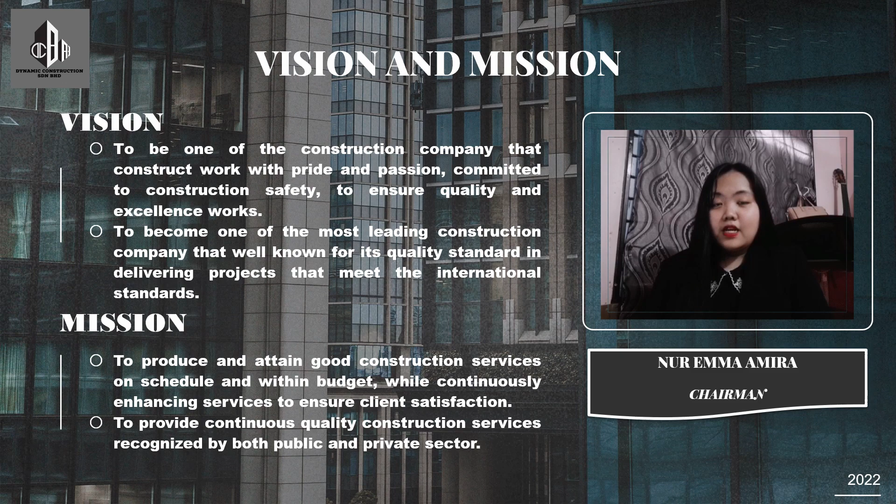We have two missions. One is to produce and attain good construction services on schedule and within budget, while continuously enhancing services to ensure client satisfaction. Another is to provide continuous quality construction services recognized by both public and private sectors. That's it for our vision and mission. Thank you.

This is the corporate structure of Dynamic Construction Sendirian Berhad. The chairman of this company is me, Nur Emma Amira. The chief executive officer is Syarifah Zawanie binti Zulkifli. The chief operation officer is Ezzah Amani Nur Afiqah binti Jamlin. The chief marketing officer is Muhammad Hazik Haikal bin Mustafa.

The chief financial officer is Nurul Aini bin Muhammad Yusof. The managing director is Sharon Beatrice binti Jirin. Last but not least is the Executive Director, which is Nur Amirah Fatin binti Mustapha. That's it for our corporate structure. Thank you.

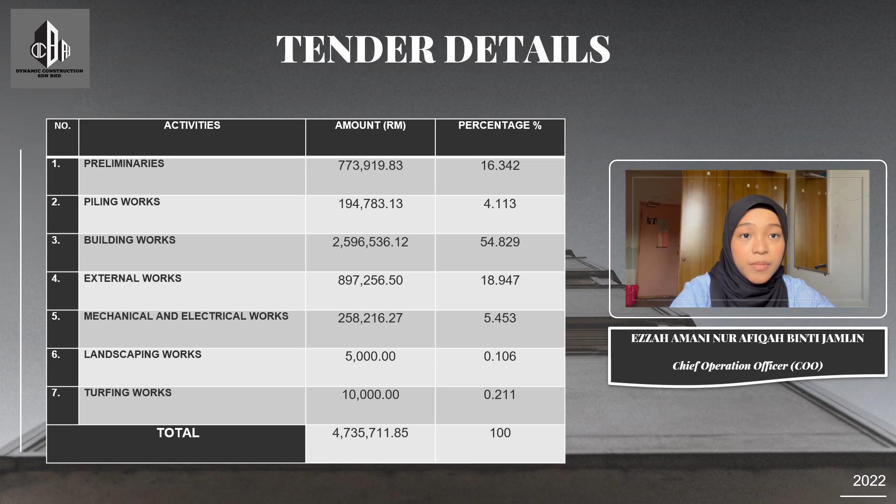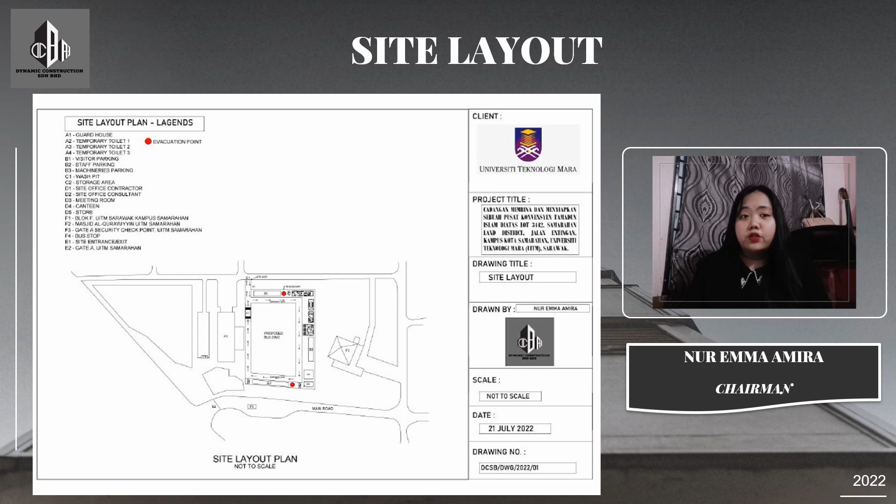Greetings. I present to everyone the site layout for our project. Each detail is drawn carefully by following the standard measurements and based on the actual size and shape of the project site. All the details on the exact location of each building are written in the legends.

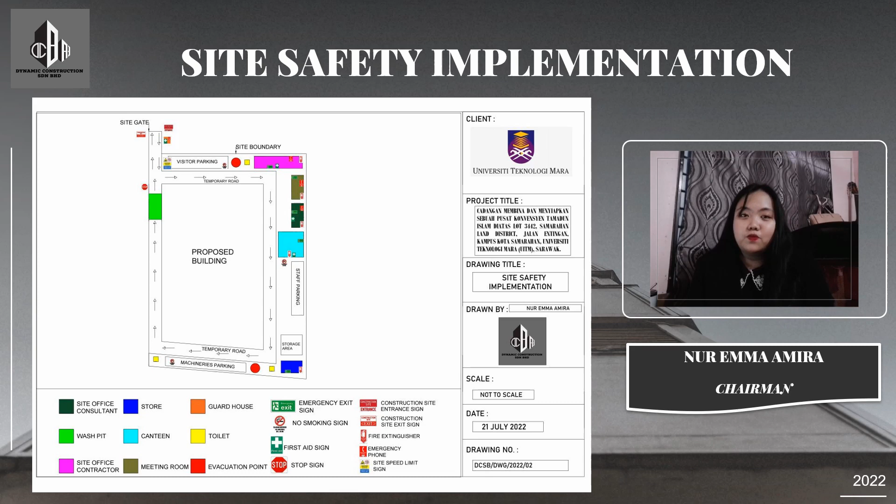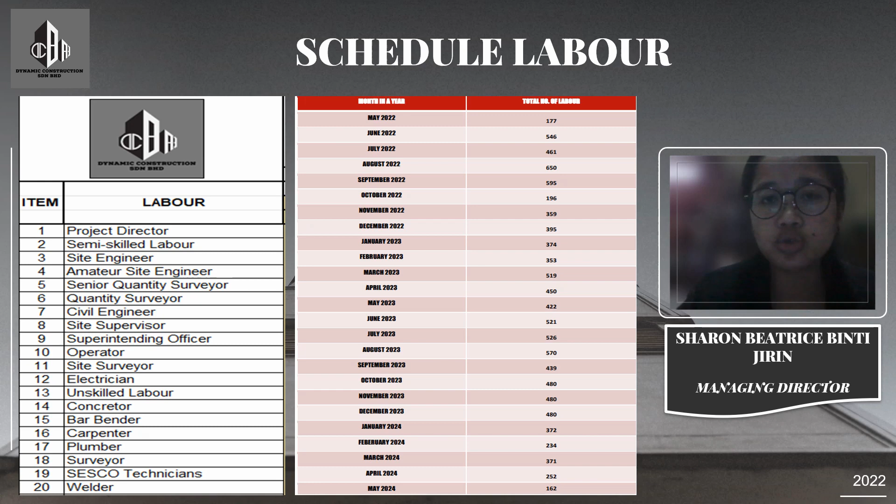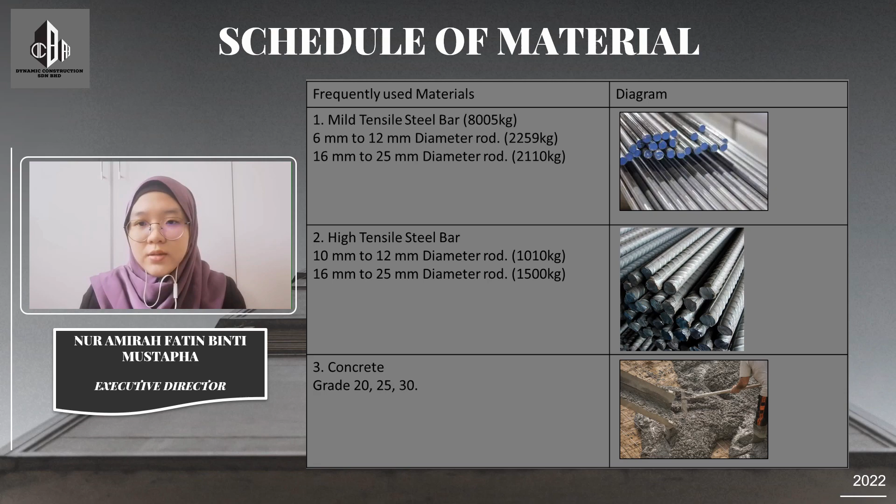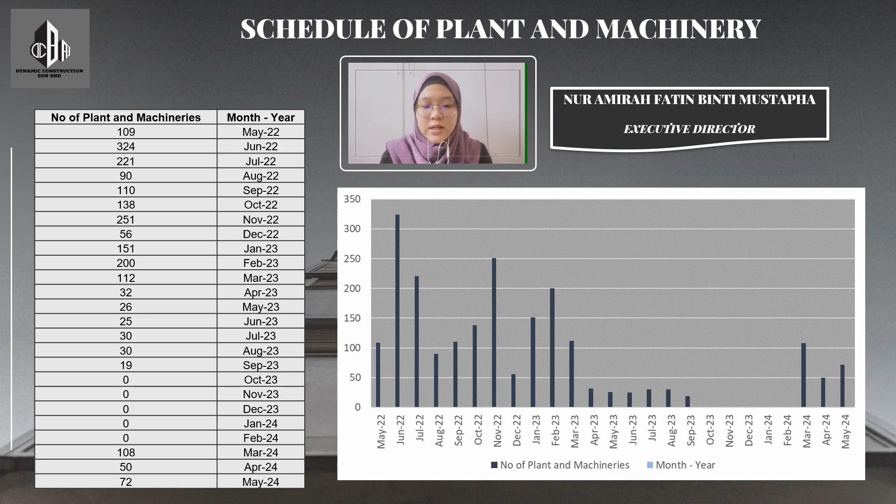Next is about schedule of plant and machineries. The highest use of plant and machineries is 324, which is in June 2022, and the lowest is 19, which is in September 2023.

I will talk more about extension of time. Extension of time is a delay which could not be reasonably foreseen at the time of contract signing. The granting of an extension of time relieves the contractor from liability of damages such as the LAD, from the original date of contract completion for the period of grant.

For our company, the application of extension of time ranges for 3 months for this project, which is the cadangan membina dan menyiapkan sebuah pusat konvensyen tamadun Islam di atas lot 3442 Samarahan Land District, Jalan Entingan, Kampus Kota Samarahan, Universiti Teknologi MARA (UiTM) Sarawak.

Supposedly, our project should have ended by May 2024, but because of the extension of time, it will end around August 2024.

The reason for our extension of time is because of the delay in material shipments, which is also approved under PAM 2006 clause 23.8, which states that delay caused by any appropriate authority and service provider in carrying out or failing to carry out their work, which affects the contractor's work progress, provided always that such delay is not due to any negligence, omission, default, or breach of contract by the contractor or nominated subcontractor, is acceptable. That is why the delay in material shipments is more acceptable.

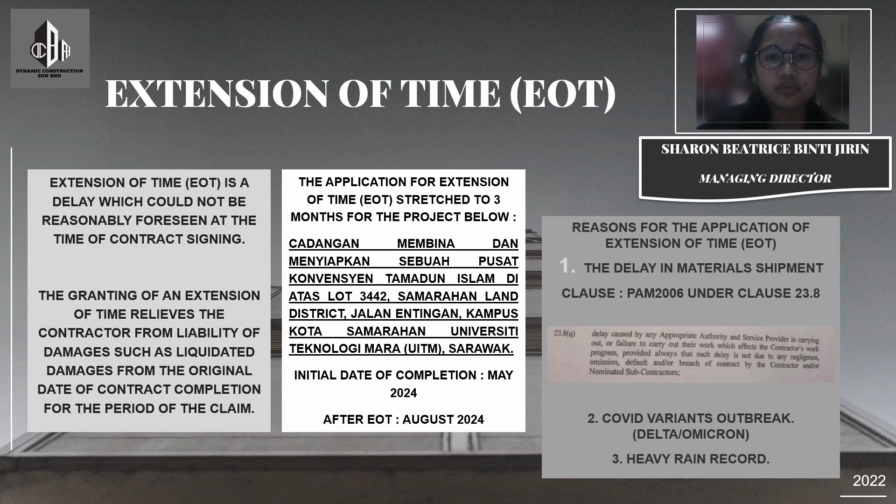Secondly, because of the COVID variant outbreak, the Delta and the Omicron, and lastly, because of the heavy rain record, especially during monsoon season. My name is Nur Amirah Fatin and I'm the Executive Director.

We present about the reasons to apply for extension of time in our project. The first one is delay in materials shipment, from 1 March 2023 to 10 March 2023, because the suppliers who were affected by the COVID variant outbreak were forced to postpone the delivery of materials to the project site. Second is about the COVID variant outbreak, which is the Delta and Omicron.

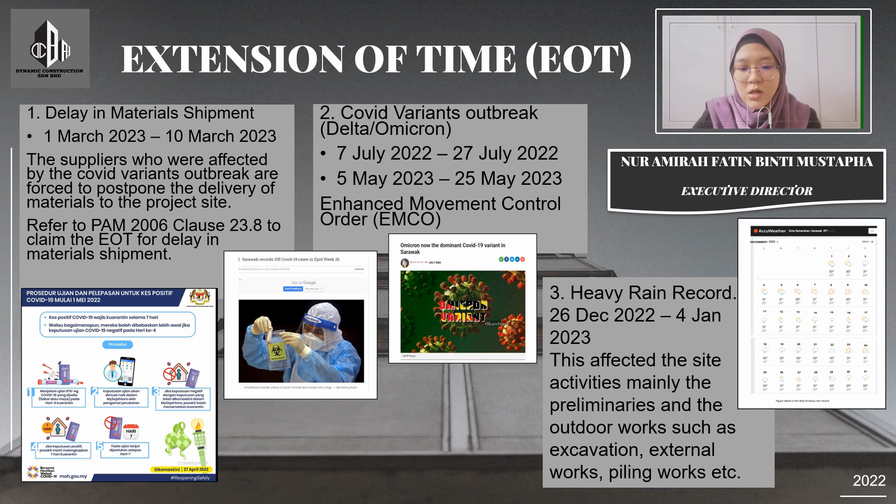For our extension of time, the dates are 7 July 2022 to 27 July 2022, and 5 May 2023 to 25 May 2023, according to the Enhanced Movement Control Order. And lastly, about the heavy rain record that affected the site activities, mainly the preliminaries and the outdoor works such as excavation, external works, and piling works, from 26 December 2022 to 4 January 2023.

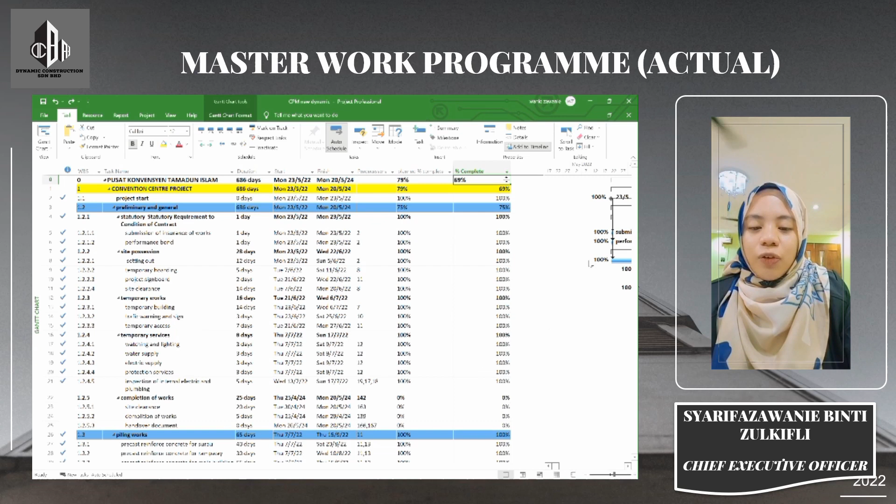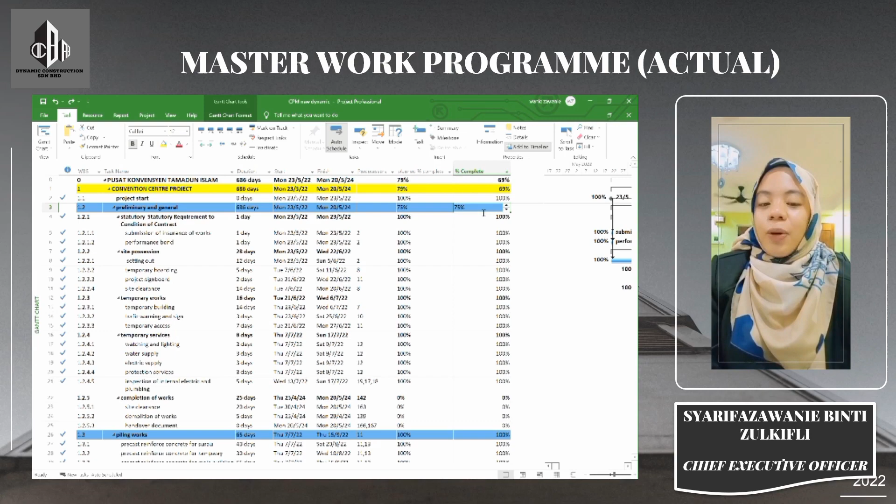Master Work Program is an activity time planning used in construction to control and monitor a project from start until finish. This is the actual Master Work Program for the proposed construction and completion of a convention centre for Islamic civilization on Lot 3442, Samarahan, UiTM Sarawak. This project started on 23rd May 2022 and is expected to complete on 20th May 2024.

In June 2023, the planned percentage of work is 79%, but the actual percent of work complete on site is only 69%.

These 69% of work are made up of preliminaries work at 75%, piling works 100%, building works 68%, external work 100%, M&E works 23%, landscaping works 0%, and turfing works 100%.

The delay of 10% from the planned percentage of work is critically from building works and M&E works. This 10% causes a 74 day delay. Hence, the project cannot finish on track as planned.

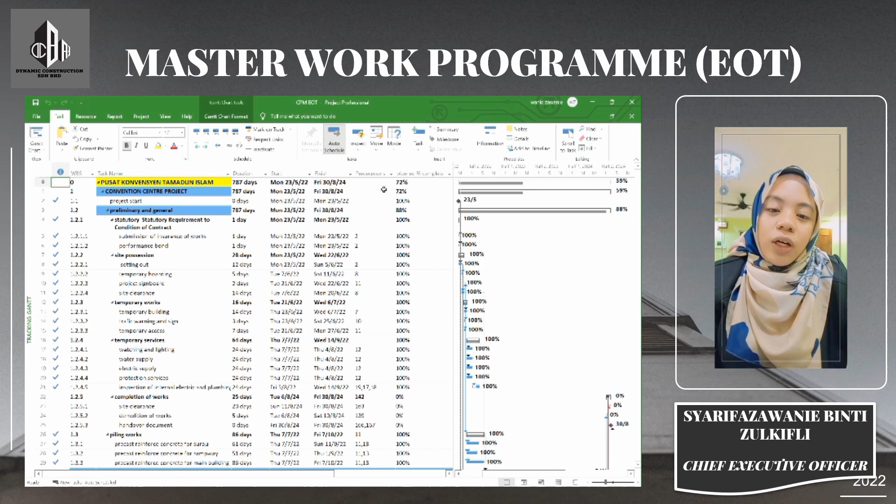So an application for extension of time to recover the delay of work was made, and a new Master Work Program was created to ensure the project can be finished on the new date, which is 30th August 2024, completely without LAD. This extension of time Master Work Program is a continuous planning based on actual performance over 24 months of the project. Hence, it closely controls all the progress of work on site.

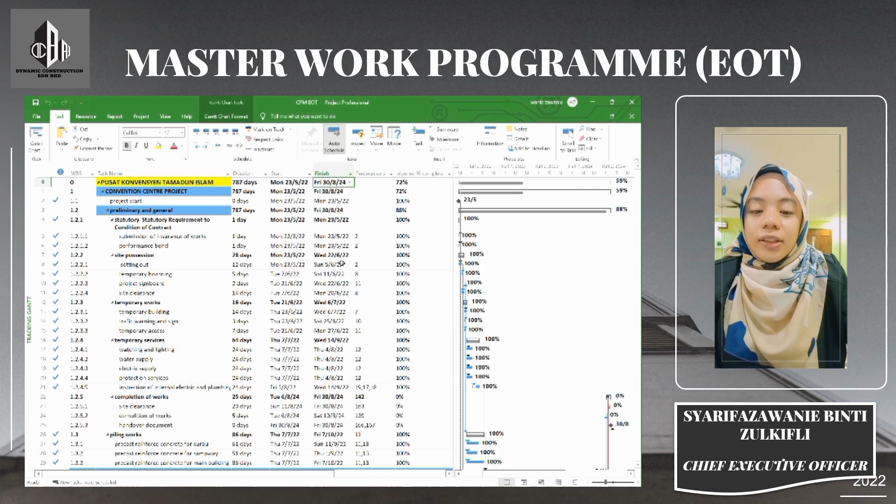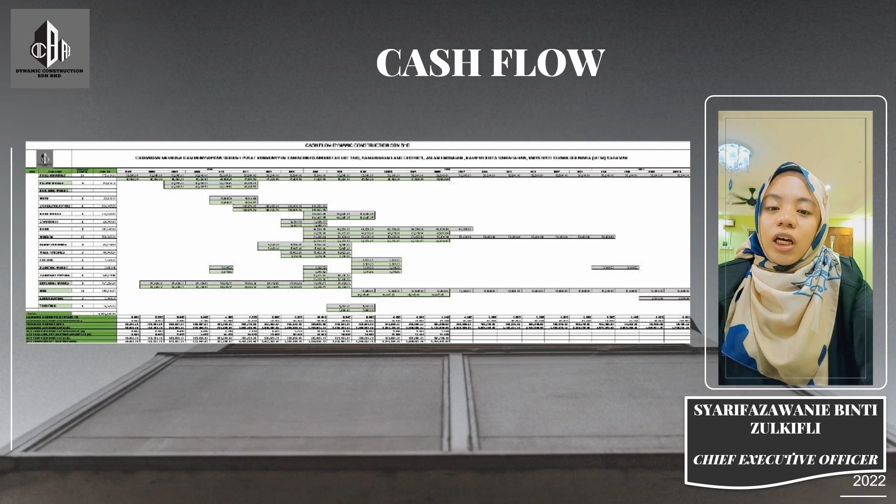The cumulative proposed cash flow until June 2023 is 3,711,811 ringgit and 22 cents, but the actual is 3,551,155 ringgit and 47 cents. The difference between the proposed and actual cash flow is because of the delayed work progress on site.

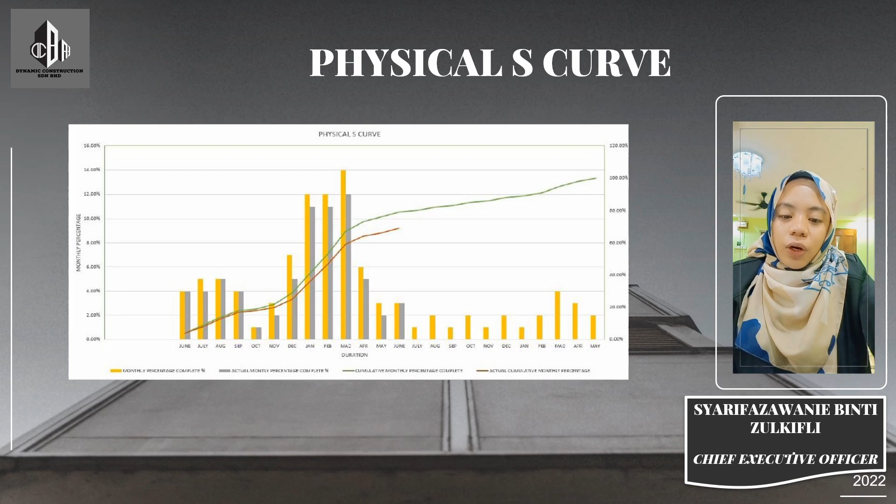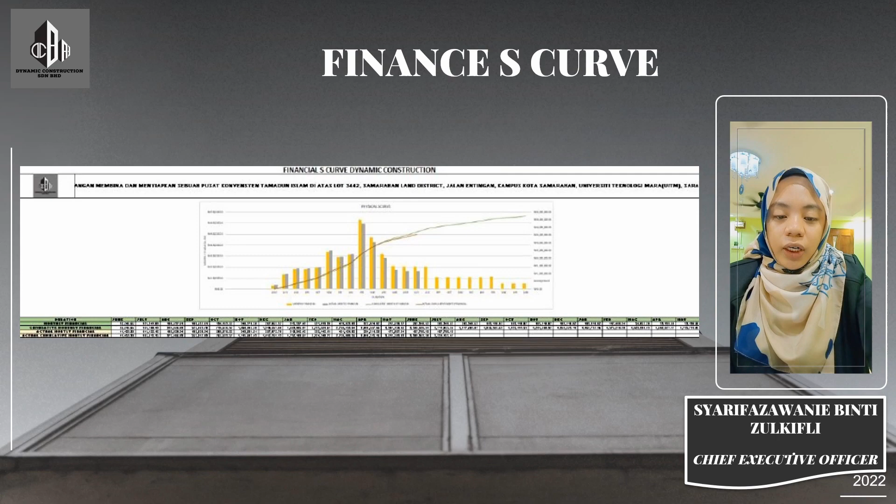For Dynamic Construction Sdn Bhd, the Safety and Health Policy form was agreed on 31st January 2016 by our chairman herself, Ms. Nur Emma Mira. Generally speaking, the purpose of having this policy is to prevent and protect workers against hazards and risks in connection with their activities at work.

Our health and safety policy is divided into 4 parts: Part 1 is the general statement of policy, duties and responsibilities. Part 2 is organization of health and safety. Part 3 is arrangement and procedures. And last but not least, Part 4 is appendices.

Moving on to the second part, the checklist form. It is a set of items or activities that a site in-charge must verify, check and inspect to ensure the systematic progress of a project. It is a great tool that can help optimize and organize a project in many ways. It has about 26 sections overall, from administrative requirements to toxic and hazardous substances.

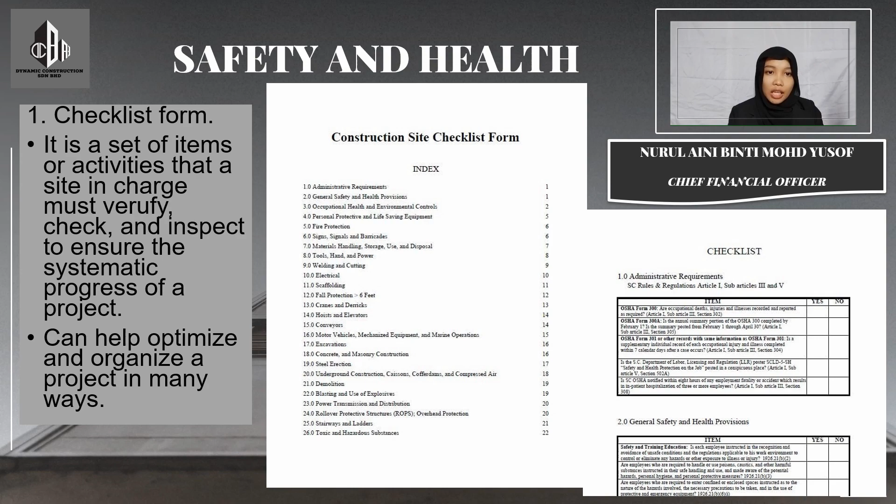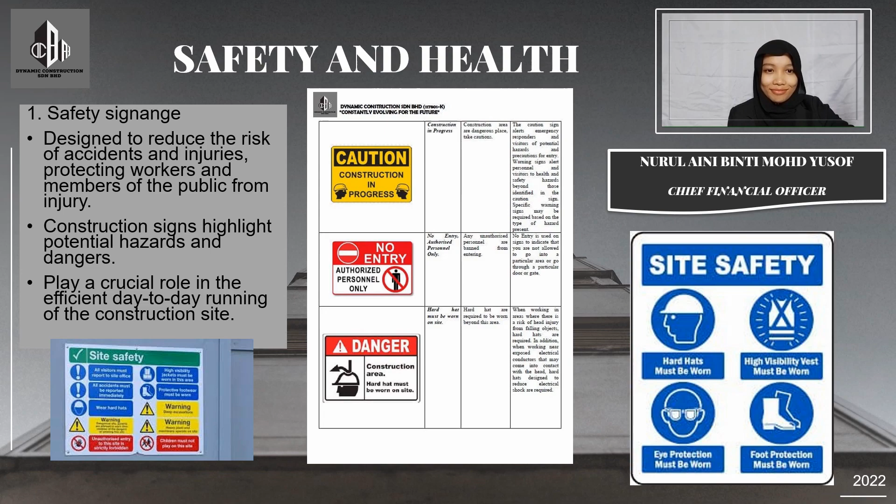Finally, accidents that occur on site. The main causes of construction accidents found are workers' negligence, failure of workers to obey work procedures, working at high elevation, operating equipment without safety devices, poor site management, harsh work operations, low knowledge and skill level of workers, and failure to use personal protective equipment.

Types of accidents that occur on our site include workers being exposed to hard cement fragments, which cause injuries; second, trucks getting stuck in the mud; third, complete machinery shutdown; fourth, muscle injuries due to lifting heavy material and equipment; and last but not least, cement dust making vision go blurry.